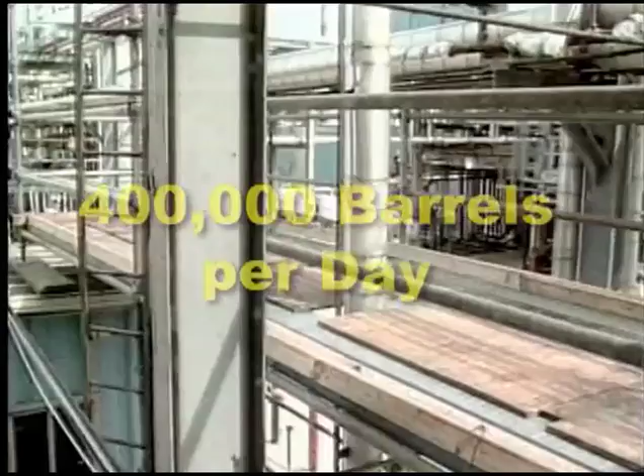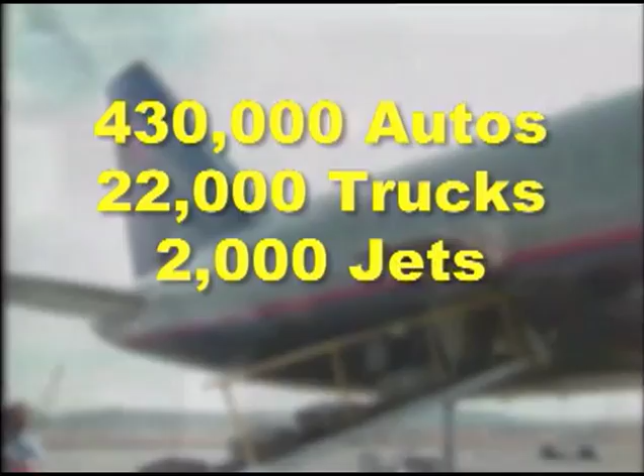The oil refinery, operated by BP in Whiting, Indiana, has the capacity to process more than 400,000 barrels of crude oil every day. The refinery operates 24 hours per day, 365 days per year. On an average day, this refinery produces enough products to fuel 430,000 automobiles, 22,000 semi-trucks, 2,000 commercial jetliners, and to fill 350,000 propane tanks.

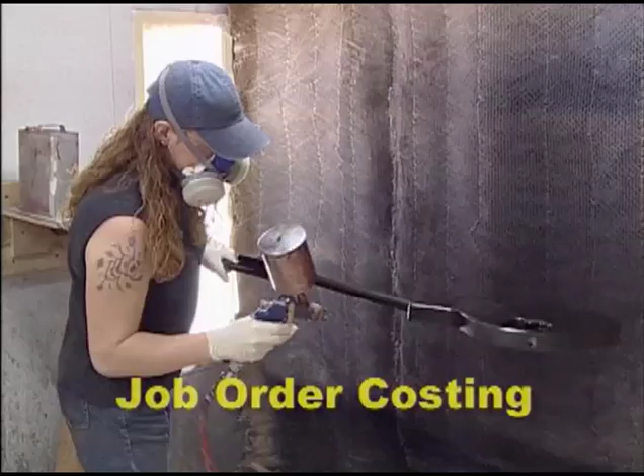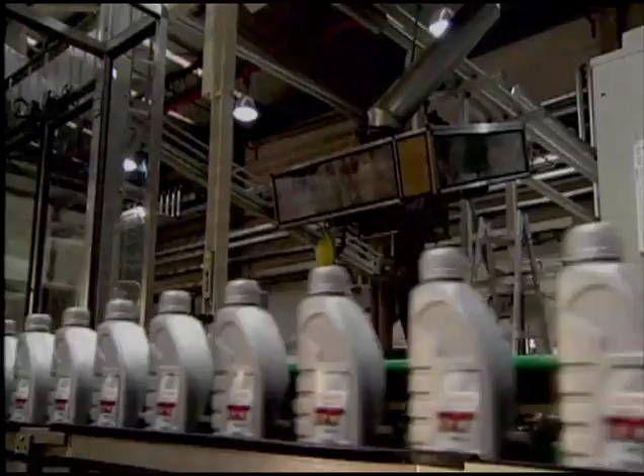Determining the costs associated with a high level of continuous production requires a specific type of accounting. Companies which produce many unique products measure the cost of each individual job through job order costing, which keeps track of all costs related to specific custom orders to determine the cost of the finished product. Companies which mass produce identical or similar products use an accounting method called process costing. In process costing, a company allocates all manufacturing costs to production and divides by the number of units produced to determine an average cost per unit of production.

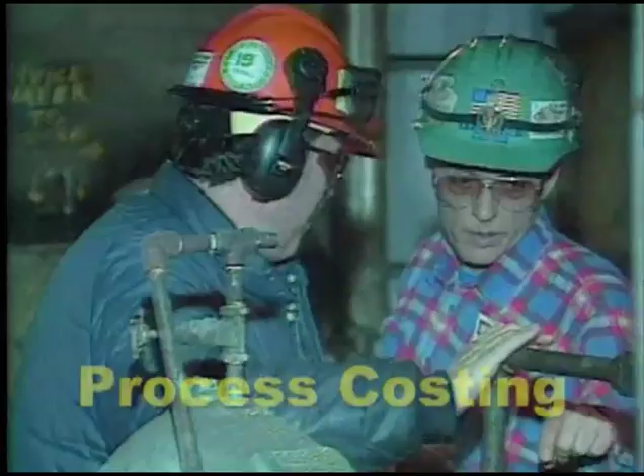The BP refinery in Whiting, Indiana, uses process costing to determine the costs associated with the many products they create every day. In a refinery, a barrel of crude oil is refined into a number of different products. Gasoline and heating fuel are lighter products, while greases and asphalts are heavier products.

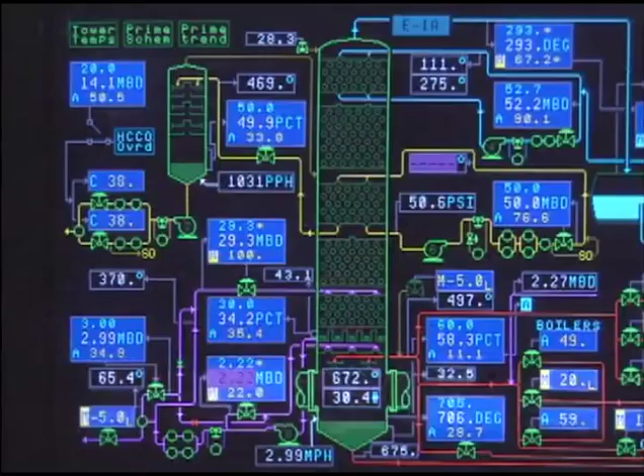As the crude oil passes through various processing units, heat and pressure are applied to separate the products. A refinery is a continuous process flow, so we bring crude oil in and we make everything from gasoline to asphalt coming out the back end. So those are the things that the consumer buys in the marketplace.

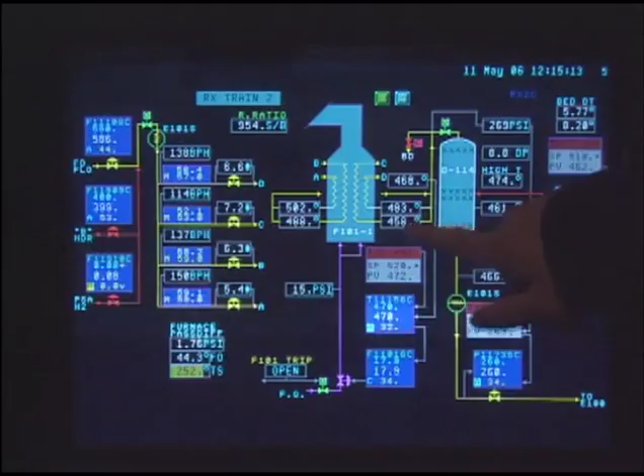Crude oil is the primary feedstock for a refinery, so we actually manage the accounting from fence line to fence line, and we typically don't measure what's happening from unit to unit. We measure the inputs and the outputs to find out how much value was actually added. In order to determine costs for a process, you need to know the total costs of the raw materials and the total number of units processed in a specific period of time.

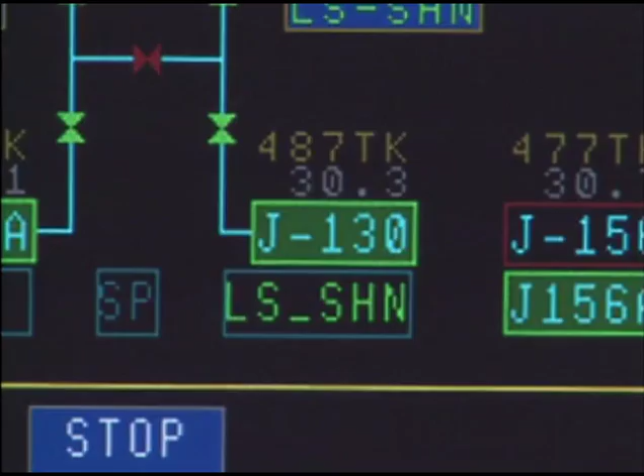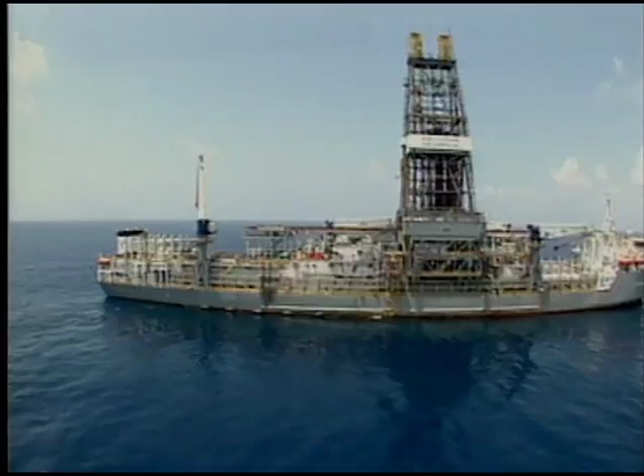Everybody's familiar with WTI, West Texas Intermediate, which is a nice sweet crude that makes a lot of gasoline. But you can run anything from a WTI to some of these Canadian crudes that people may not be as familiar with. So what you're looking at is the differential between a sweet crude and a heavy crude versus the types of products I can actually get from that crude off the other end, and you try to optimize the margin over the raw material being the crude.

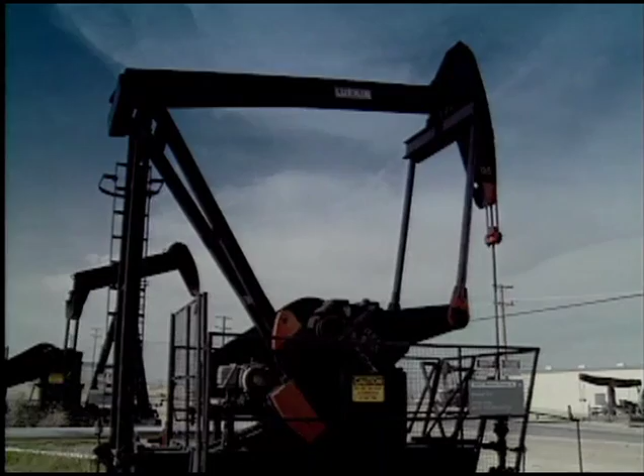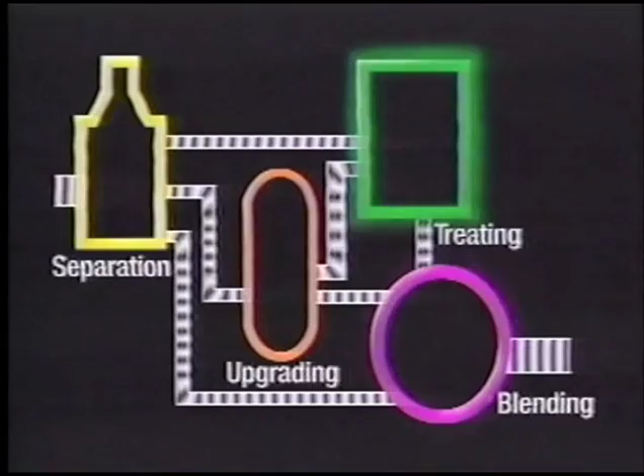The price of a barrel of crude oil fluctuates, sometimes rising and falling in the course of a day. Other materials used in the refining process also affect the cost, like your chemicals and catalysts, which actually help in the processes. A catalyst actually enhances the reactivity to make a molecule turn into something else, whereas a chemical actually becomes part of the product and goes out in the process.

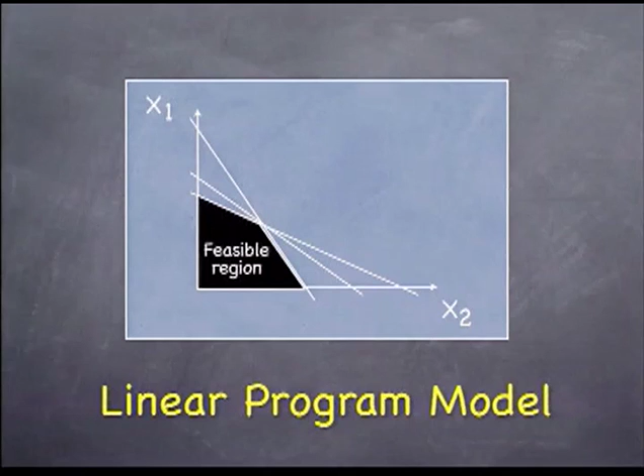To account for these variables, BP uses a linear programming model to calculate the most profitable mix of products to be produced from the crude oil input. Using current market prices, this computer model helps engineers determine which products to produce in order to maximize the gross margin of the outputs. With this model, the volume of each output and the costs are calculated simultaneously.

In addition to raw materials, the cost of labor and overhead is part of the overall cost of the process. The Whiting refinery tracks these costs on a monthly basis, including the repairing of the units and the maintaining of the units.

Management is a fixed cost. All labor is mainly a fixed cost, because if we have a unit that goes down for a turnaround, it doesn't mean I get rid of my labor pool. It just means they're redeployed doing something else. Some of the operation folks actually work on the turnarounds. So we see those costs as fixed in nature, so they don't fluctuate depending on how you actually run the refinery.

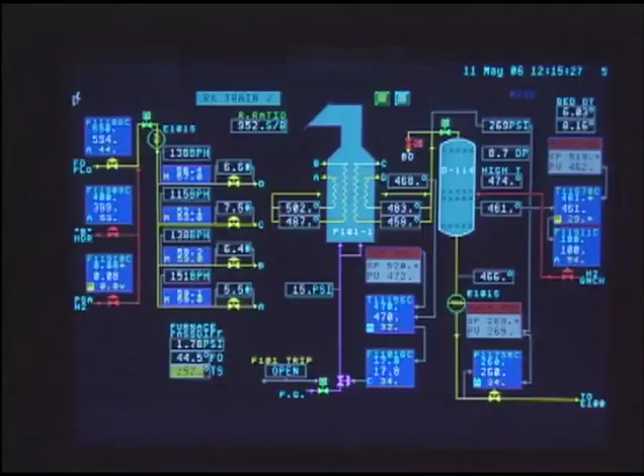In traditional process costing, partially completed units are converted into an equivalent number of completed units. These units are tracked through a work-in-process account. However, because production at Whiting never stops, the refinery does not calculate equivalent units. There's really not a work-in-process account like you would probably see in an automotive industry or something.

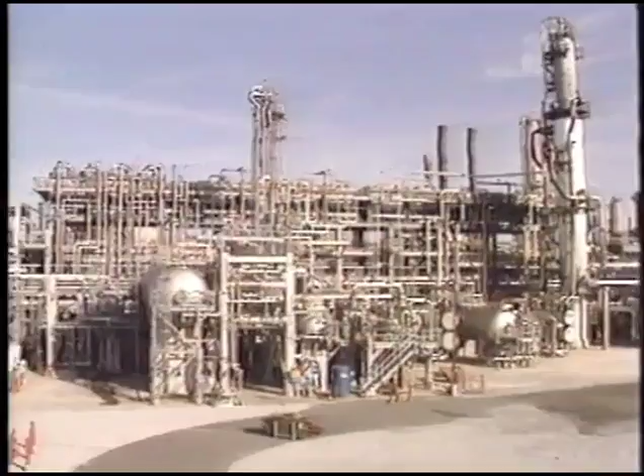So if I have a crude unit, you would say everything in that unit and prior to getting to the unit is crude oil. And it would just be a constant that was calculated by the engineers based off of the size and diameters of all the pipes that all this stuff is sitting in. And it remains a constant until the unit comes down for a turnaround or it goes down for some unexplained reason.

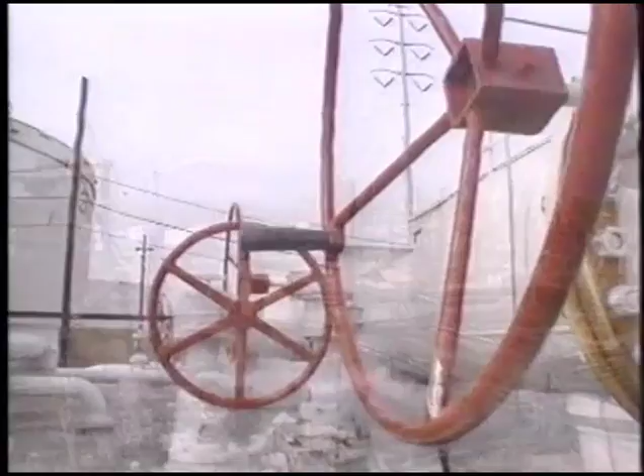Because the diameter of the refinery pipes is constant and the pipes are always full, the beginning and ending work in process inventory is the same. The only difference is in the value of that work in process. Since the dollar value is small relative to the total output of the refinery, its effect on production cost is not significant.

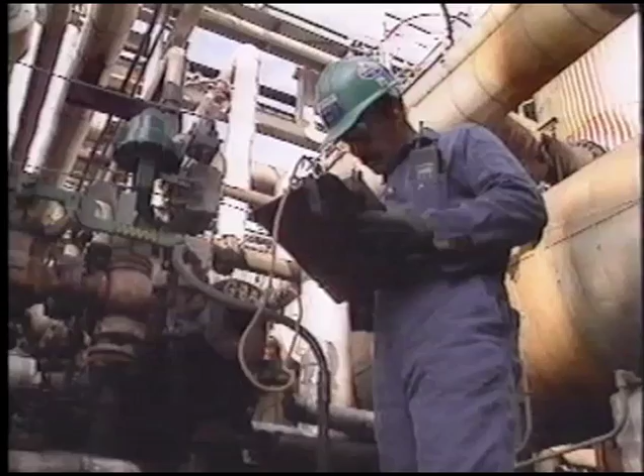Determining the costs associated with running a refinery is complex. The cost of crude oil fluctuates constantly, as does the price of gasoline and other products into which the crude is refined. By calculating process costs using a linear programming model, BP can manage these dynamic variables and set production at a level that maximizes gross margin. This system ensures the best use of the precious crude at its refineries around the globe.